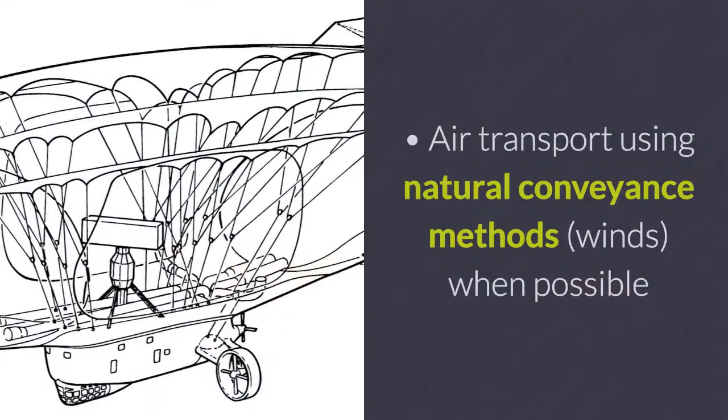Air transport using natural conveyance methods, winds when possible, and means for power, e.g. solar and fuel cells that harness rather than harm the atmosphere.

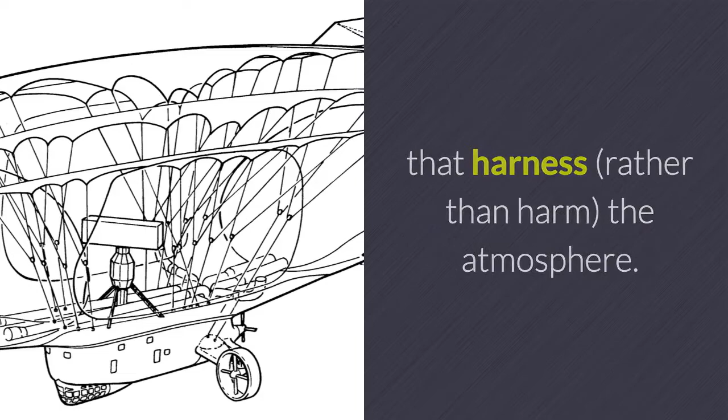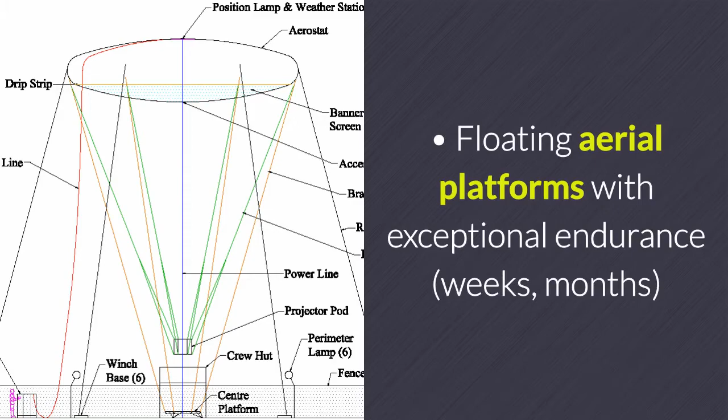Aerial cruises for unhindered joy of air travel and the natural wonders of our world. Floating aerial platforms with exceptional endurance, weeks, months, for various duties. Ground infrastructure wherever needed that easily fits with and protects the environment.

To enable these possibilities, we work with aircraft developers, producers, operators, etc. who know the business, and the airworthiness authorities in structured ways from the ground up.

Summary. As LTA aircraft engineers with significant airship design experience since circa 1980, we understand the issues concerning their development and operation. We also understand their history, where it's clear the industry needs better ways for success.

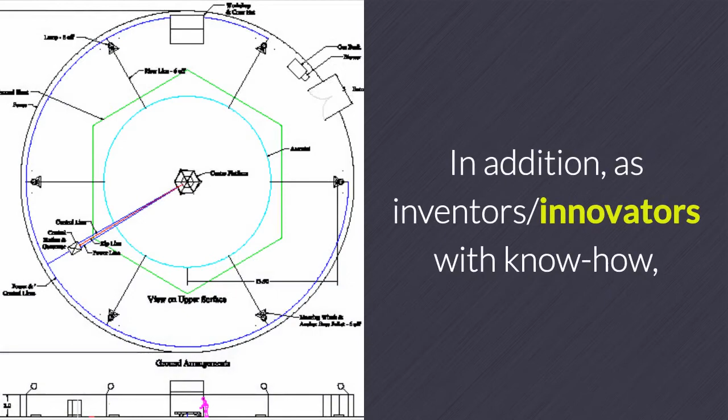In addition, as inventors, innovators with know-how, we want to help create better ways for people to live. Embracing people with verve and fresh ideas for new technology is our way, making a better future.

Indeed, our aim is for state-of-the-art digital capability to provide Industry 4.0 solutions.

From consideration of past doings, we have a strategy for the development of new designs that scale up from small projects when the time's right to provide bigger sizes.

We therefore have numerous projects that are readily doable, fun, and enable small operators to set up. As we and the operators grow, bigger, more complex projects already prepared will go ahead.

We will also enable new technology, like rapid response vectored thrust, necessary for success. Our plan is to grow steadily in stages, developing capability leading to LTA aircraft able to serve serious needs currently

very difficult to otherwise fulfill without huge cost, such as humanitarian aid, providing people in urgent need of supplies who are starving, freezing, and/or suffering from the circumstances they find themselves in, out of reach by other ways.

Monitoring and surveillance, watching over vast areas with very long endurance and interactive capability to provide timely help when needed, plus to call in and work with other support services.

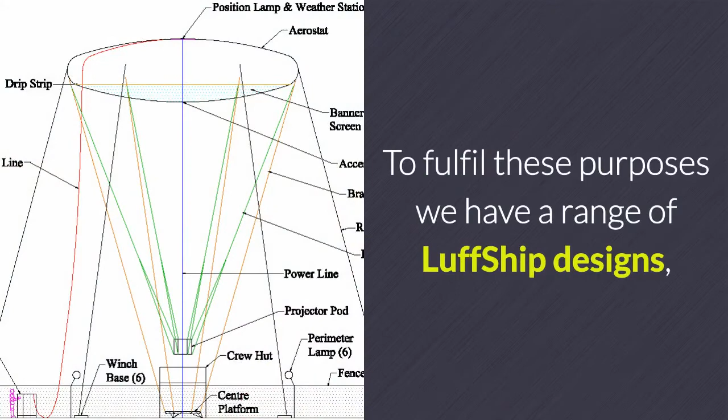To fulfill these purposes, we have a range of LuffShip designs, needing finance, political and public support for development. We thus seek subscribers interested in their success.

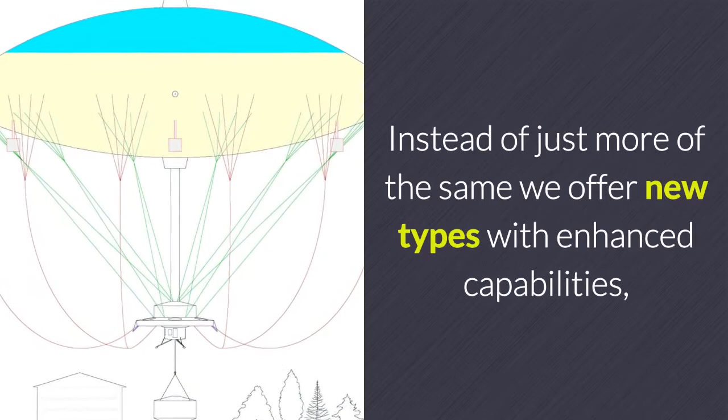Offerings. Instead of just more of the same, we offer new types with enhanced capabilities, particularly omnidirectional LuffShips that enable zero to slow airspeed, although enough to make headway against normal winds.

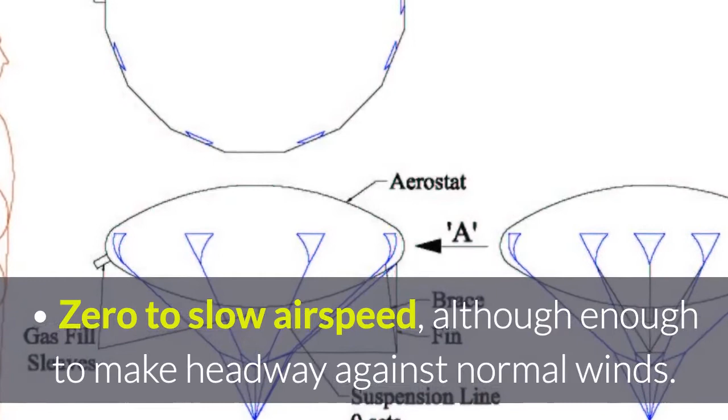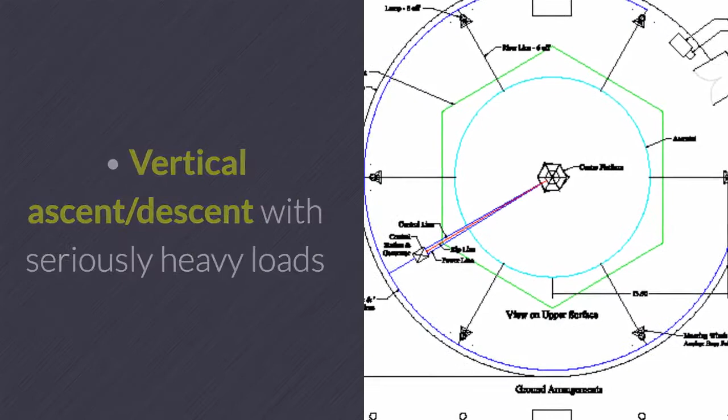Very long endurance, days or weeks and potentially months underway. Vertical ascent-descent, with seriously heavy loads and associated geostationary positioning with controllable heading, able to lift and place them.

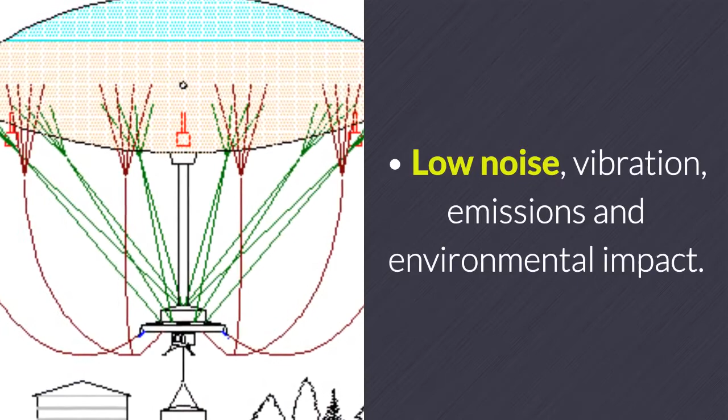Low noise, vibration, emissions and environmental impact. Unobstructed viewing or scanning all around for various purposes.

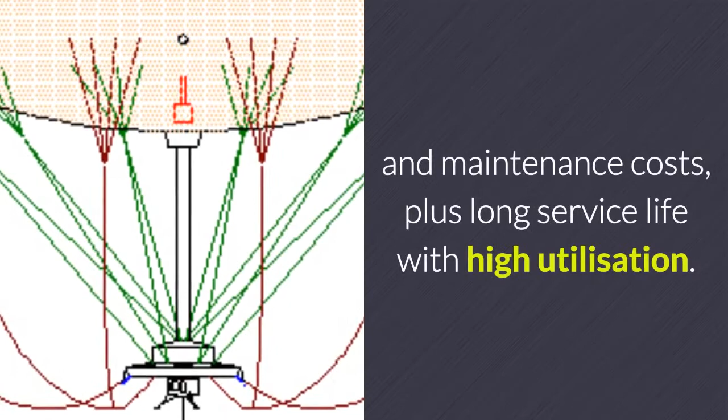Reliability with low acquisition, operating and maintenance costs, plus long service life with high utilization.

Little need for associated ground infrastructure, no runways, an ability to access small ground locations in difficult territorial regions.

Goals: 1. Become profitable, securing the business, with readily doable projects including inflatable structures, LTA drones and captured aerostats, each enabling particular aspects and new technology.

They also are to develop team skills and cooperation with suppliers, plus gain airworthiness approvals necessary for later manned aircraft developments, and to cultivate relationships with operators who will need training and supply.

2. Develop, certify and enable a series of bigger LuffShips, able to be manned following our strategy for growth under progressive balloon, normal and commuter category certification rules, leading to transport category types for serious aerial purposes.

3. Provide operators with ways to set up and extend their aerial services at each stage, between a network of bases that they arrange, internationally, installing infrastructure needed for bigger types.

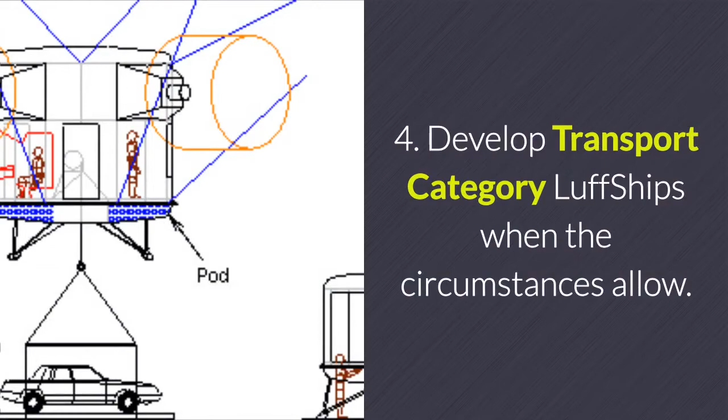4. Develop transport category LuffShips when the circumstances allow. Objectives: attain Goal 1 within a 2-year period, leveraging things already undertaken.

Achieve Goal 2 within a further 5 years, after which the technology should be accepted to follow through for Goal 4. Work with propeller control and power system specialists to develop and provide particular system capabilities desired, including cycloidal propellers,

drone-style control systems, replenishable electrical power generation, and efficient Tesla-style drive systems. Provide technical support services for developers, producers, suppliers and operators and people who want reliable LTA solutions.

Benefits: by way of example, operators will benefit from affordable LuffShips with better deployment, suiting their needs, involving fewer crew and easier ways to securely manage their assets compared with traditional airships.

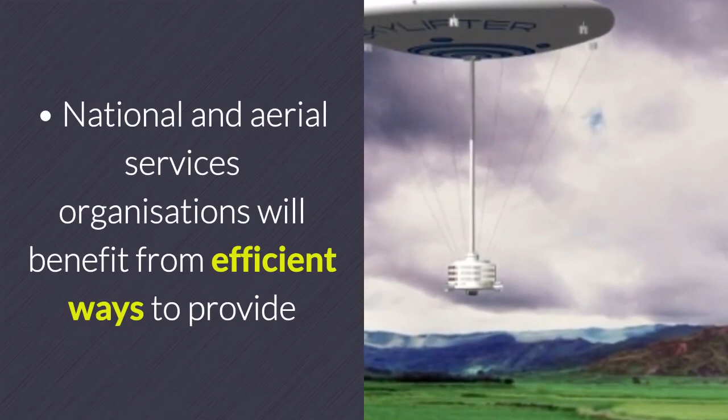Local communities will benefit from employment opportunities and the aerial services enabled, facilitating transport and trade, especially people in isolated places with poor infrastructure. National and aerial services organizations will benefit from efficient ways to provide persistent coverage over large regions, otherwise difficult to consistently watch over.

General industry, agriculture, forestry, natural resource providers, etc. will benefit from point-to-point ways for delivery and extraction directly.

Investors will benefit from business arrangements with focus on income at every stage.

Investment. Investment in LuffShip proposals is one of the only ways for sustainable, affordable aerial services that don't adversely pollute our atmosphere or waste finite resources, enabling better ways for our children's future.